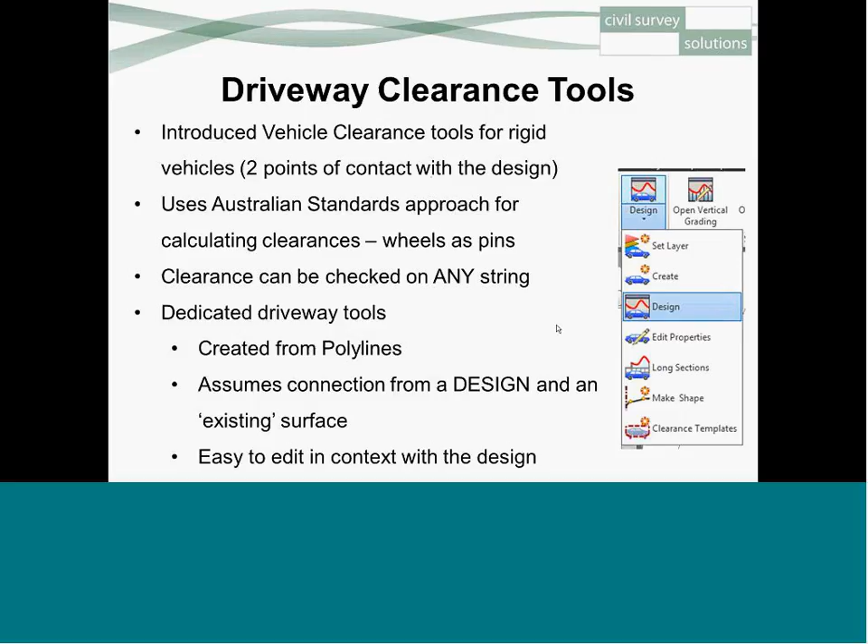Okay, moving on. In terms of the pure driveway design process, this is the interface you'll see when you make a driveway, and I'll take you through all of the tools in there. It is polyline driven. You can use as many polylines as you like to reflect the driveway. So sometimes your driveway is quite complex and your left and right side of your driveways need to be graded differently, and you can actually check clearances at any point along your driveway.

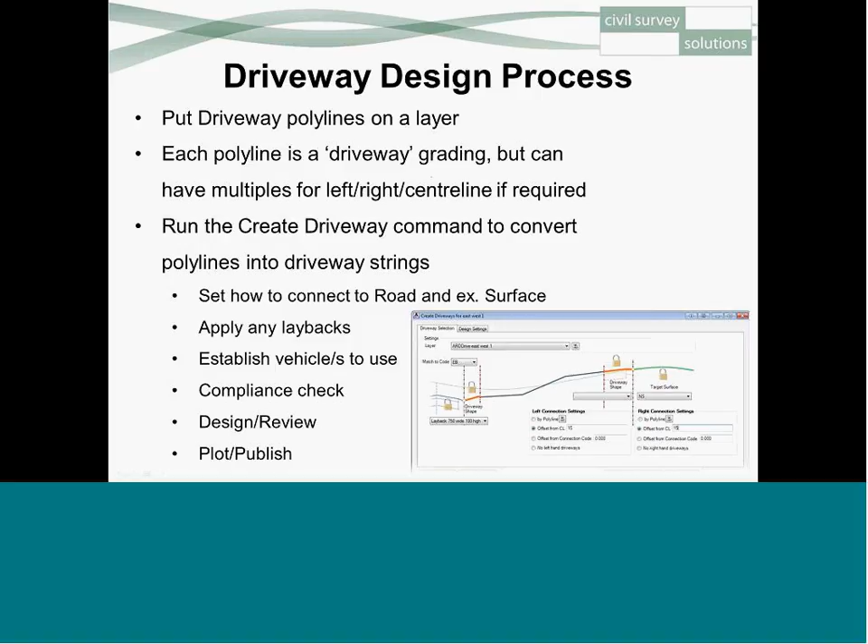I will talk more about the design setup, but this panel you see down the bottom allows you to relate polylines as driveway gradings to road design and to the existing surface. From a process perspective, once you've created your driveways, or even before that, you can always check your clearances. Once you create your driveways, there's a dedicated compliance check tool for driveways, and the image of that's on the right there.

It's going to highlight where it's run along your driveway strings and it's found a clash. Sometimes the sensitivity of that is higher than you want, which we will work on in the software, but it's certainly a great way to quickly identify driveways you should review.

When you're in the vertical grading editor, you can elect to show vehicle clearance along your string. It doesn't matter whether it's a driveway string or a pure road string or any other string that you've drawn. Okay, so if you want to simulate going down into a basement car park and there's steps in that basement car park, you can do that by creating an alignment, turning it into a string, and running the vehicle checker on it.

So it doesn't matter what you're designing, you can always check in terms of editing and stuff, but we'll come back to that. Let's start pushing in a little bit of a design here to have a play with. Okay, so I actually have a road design here. Most of you will recognise this. This is our timeless classic of Marin Street.

What I want to do is just introduce you to the driveway tools. So in terms of the driveway tools, they're all sitting under this panel called driveway. You'll see down the bottom that there are two settings controls. One is the idea of making a shape, which is used to tell the software you'd like a certain layback.

So if you work in local government or if you're doing subdivisions or any sort of road design, you'll know that you've got a strict curb shape that you like to design, but then once you hit the driveway, you'll normally lay that down into what's called a layback, stretch it out. For us, we called that making shapes because you might want to, at the other end of your driveway, where it connects to the property, put in a footpath or have a flat area representing a garage or something like that.

The clearance templates allows you to build your own clearance design for a vehicle. So a truck, certainly we've got the 2 Australian standard vehicles in there, but you can design your own vehicle shape and route that along your driveways to see what happens. I'll show you how that works later on.

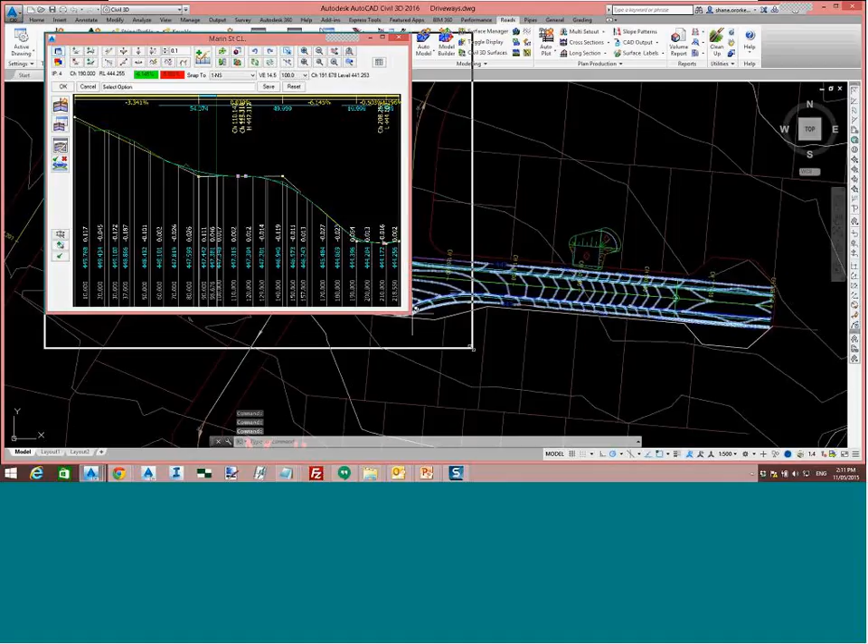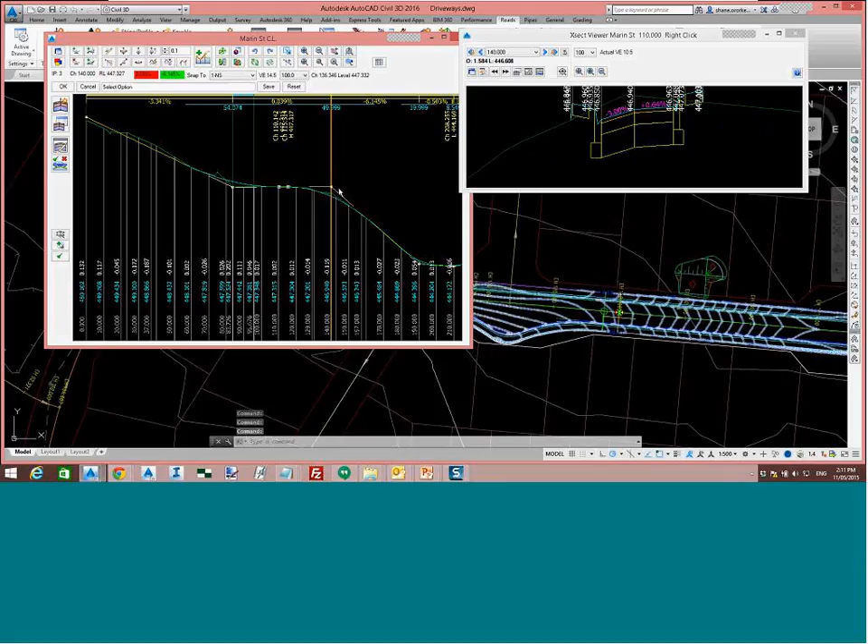Okay, so we've got a road design here. I'll just quickly open it up with a vertical grading window. So we've got a road. It's running from west to east, so from left to right. If I right-click somewhere, we'll see that there's some variability in the cross section. So I've applied some super elevation to this. I've also pushed the right-hand side out onto an alignment, so you'll see it sort of widens out, comes back. So there's crossfall changes happening. There's also some width changes happening to that road.

Now, in terms of checking for clearance, there's an icon on the vertical grading editor that allows you to pick a vehicle shape that you make and run that along your design. So the ones that come with the software are the B85 and the B99. We did have a generous donation from one of our customers with some clearance checking that they'd done. So they've been quite innovative in applying the vehicle tool as a sight distance checking tool.

I'm going to check it every 1 metre along the road, and I want to also draw the vehicle on the design. So in simple terms, you pick a vehicle to run through, how often you want to check that vehicle for clearance, what to do at vertical curves, so it splits it up into 10 segments to check. Do you want to show the forward and the reverse movement of the vehicle, or just forward or just reverse? And then do you want to draw the vehicle on the long section on the vertical grading window?

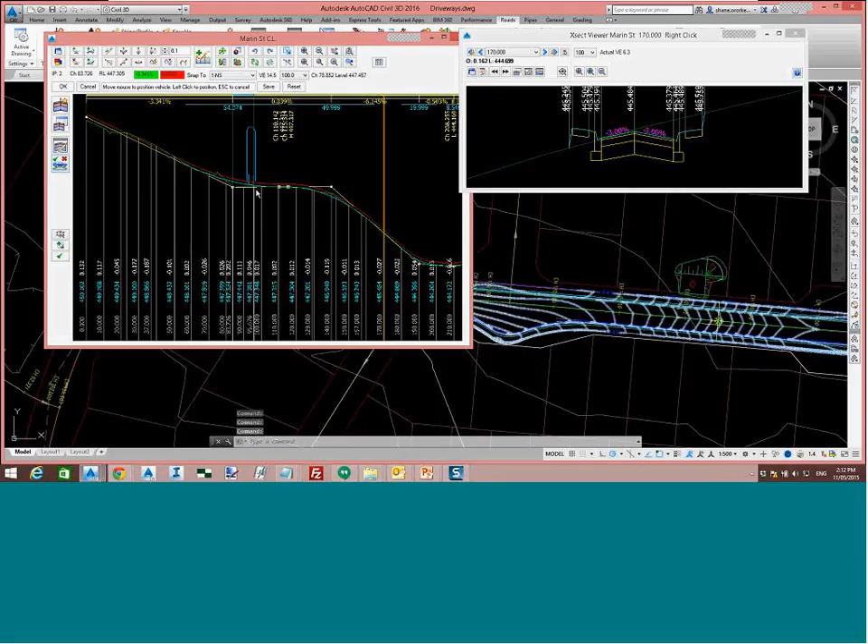The most useful one I find is showing the vehicle where it clashes, but probably the sexiest one is forwards and reverse. If I just click OK to this, what you'll see is I'm now running a vehicle along the design. You'll also see when we zoom in and have a look, there's a red line and an orange line which you can't see. You can change the colours of those, but they are showing you the clearance of that vehicle.

If I just change the exaggeration here to say 2, you'll see that we've got a vehicle and we're pushing it along the design. So anytime, any string, you can run a quick vehicle clearance check. The clearance check is dynamic.

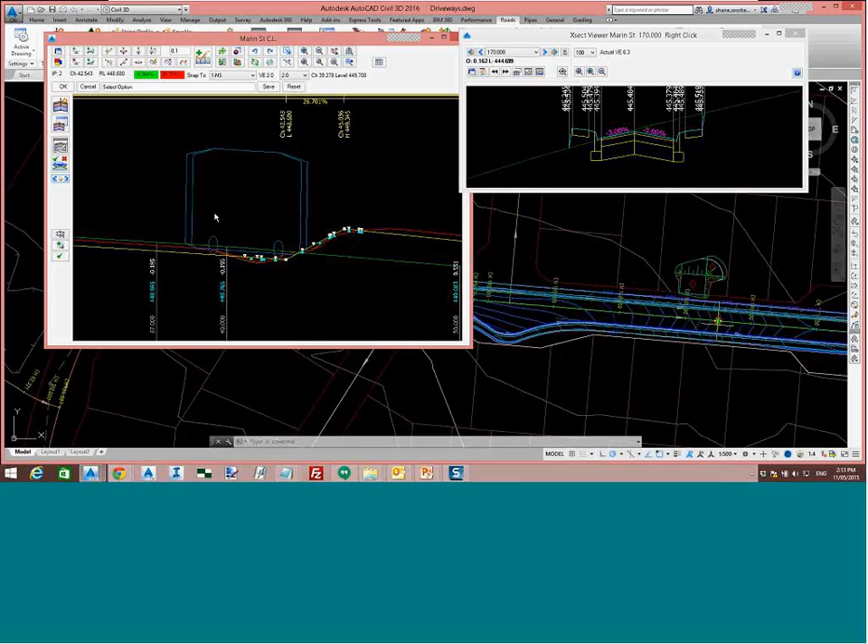IPs into the design. Actually see that it updates what's going on with that vehicle. If I click on this little icon on the left-hand side here, I can start moving that vehicle again against the design, and you can see that it's actually showing you where you're going to have clashes in a forward sense and a rear sense. So these little triangles that you see are actually highlighting where the vehicle's hitting the design.

When you move your IPs around, you can smooth out those issues. So you'll see I can push and get to a certain tolerance point, and then the software starts saying, hey, we're going to clash bottom out here and bottom out the other side. So once you push a vehicle along a design, you can then run that vehicle along and check. But these little triangles that you see, they're a highlight that you're going to have a problem with running a particular vehicle along your design.

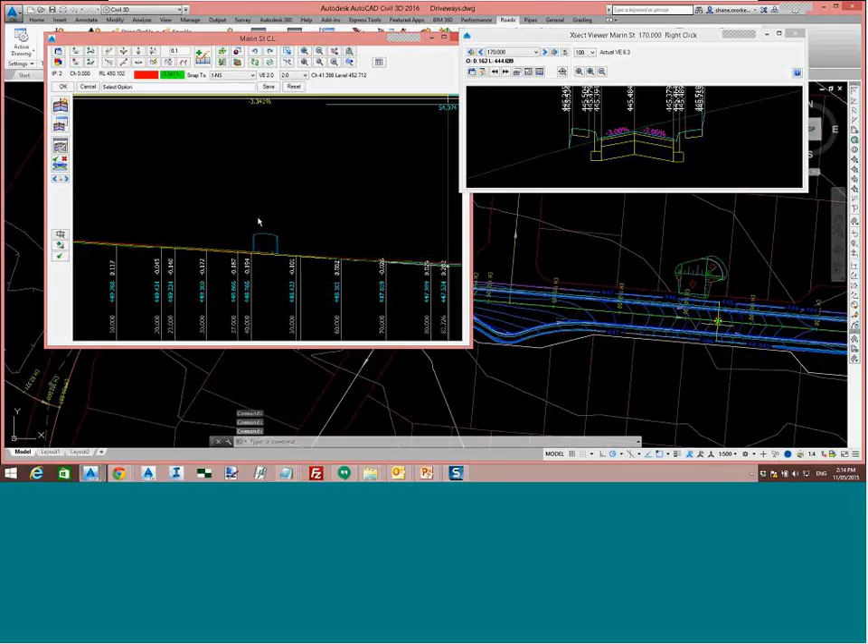You can certainly come in and change that vehicle type. So if I want to check the B99, I can check what the B99 is going to do. And it's going to be closer, but it's still going to work in this case. So this next one's pretty cool in terms of clearance checking. You can download from our website, from the Advanced Road Design blog, an enhanced series of vehicle templates. I'll show you how to make your own.

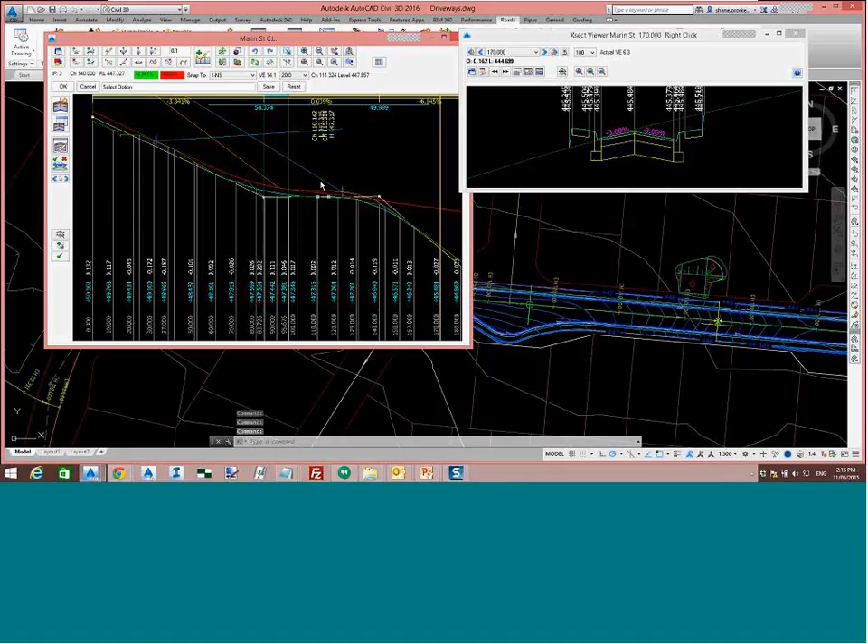But if we were trying to run a truck along here, 60 kilometres an hour, I know that you've got downhill controls and uphill controls that differentiate this. But if we quickly just assumed a certain sight distance control, we could actually run a quick vehicle clearance check. So this might seem odd to look at, but what the software is doing is it's showing you a 0.2 height here and a 2.4 height the other end. So we're running sort of a truck clearance in one direction and in the other direction. And the software is drawing some clearance lines here to show whether or not we're going to get sight distance for our truck running along the design.

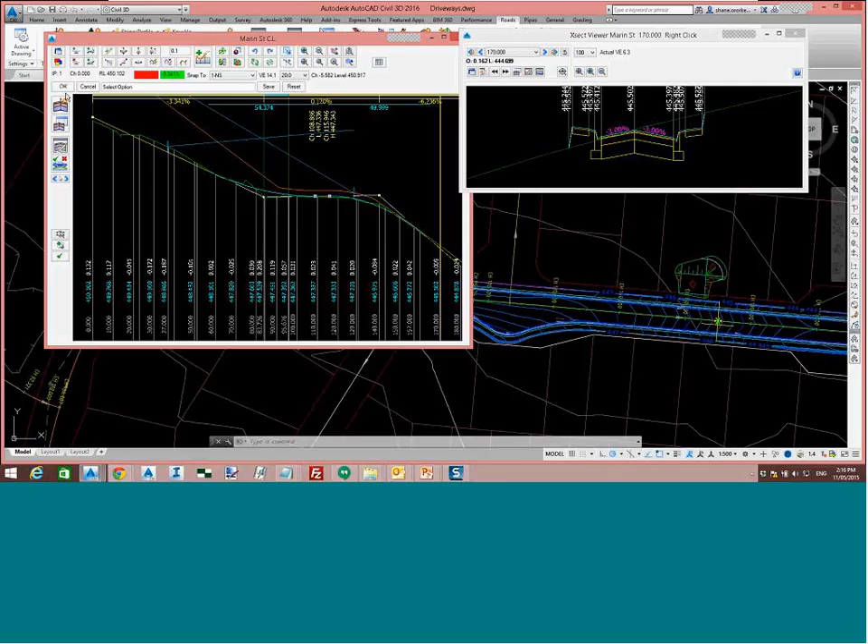All right, so you can be quite intelligent on how you use this. This is quite a sweet way to do some clearance checking for sight distance as opposed to a traditional sort of run-of-the-mill check on vehicle clearance. All right, so that's showing you that on any string we can apply a clearance shape and do a check. But let's have a look at it in the context of a driveway. So we want to check some driveways here.

I've deliberately created a funny sort of design pad here for us to check against for a garage. But in the basic sense, on the south side, I actually have a polyline for where I want the driveway to stop designing. So I'm going to fake in some driveways, but this is my property boundary. This is the extent. I can't design the driveway past here. Okay. On the northern side, I'm just going to set a notional width, and we'll play around with that later on. But if you have a property boundary and it's not a constant offset from your road centre line, the best bet is to draw polylines both sides and use those as your constraints.

Your driveway, in essence, if I was to notionally draw a polyline here, if this was a driveway centre line or a driveway edge, basically I would want to hook the driveway onto the edge of the road as a design constraint, and I'd also want to stop designing my driveway at this point here, which represents my property boundary. And I can do whatever I want in between. I might apply a standard layback here to describe layback. I might design the levels of the footpath coming through here to accommodate what I need in order to get to the property.

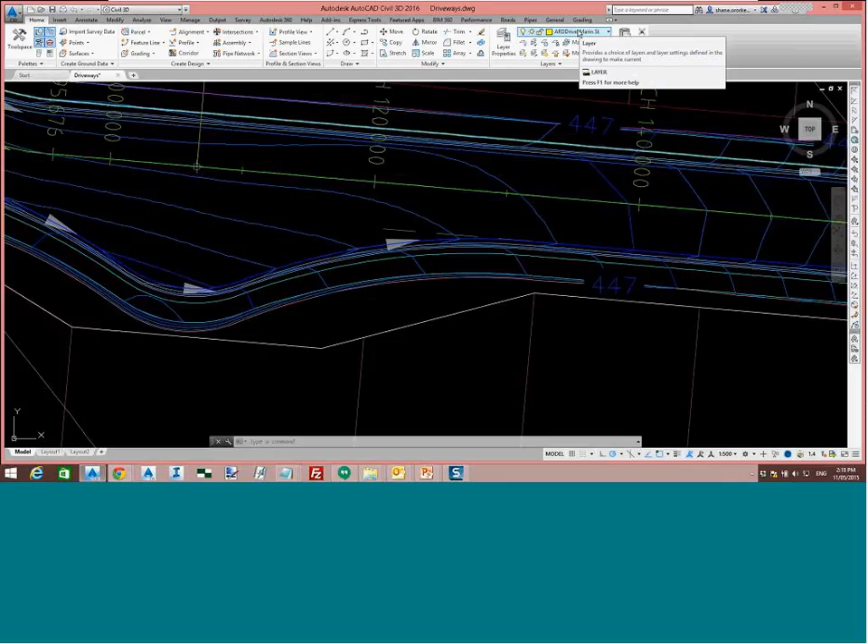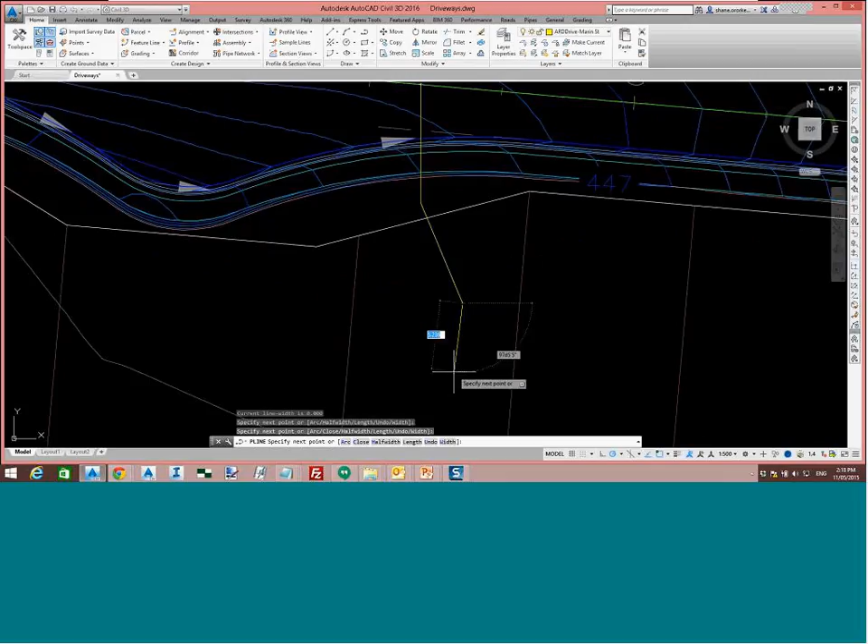You can draw any polylines you like, wherever you want. What you need to do is just put them on this layer to relate them to the string you're trying to design. So I'm going to draw myself a polyline here for a driveway. Now the driveway can have curves in it, and can be as long as you like.

As soon as I press enter, it's going to open up the driveway configuration, the driveway settings. These are overarching settings for the driveway I make now and driveways in the future. You can edit individual driveways to change how that driveway kicks. Let's just look at one driveway for the moment.

The layer, okay, that's the layer we drew our polyline on. Then you've got a code to connect to. Now this is the code off the main road, so we're connecting to the main road at a certain code. It's going to trace the road crossfall and the road shape all the way up to the invert of the edge of the road.

You can then apply a standard template at the edge of that, which we call a shape. I'll show you how to make these, but I'm going to apply an 80mm height rise with a 30mm lift, 750 width. So it's quite a generous, deep layback.

You'll see at the other end of the equation, the other end of the driveway, you can establish and apply a shape from the end of the driveway. The end of the driveway is where you connect it back to the existing surface. When I say the end, I really mean the end of the design of the driveway.

So when you draw a polyline that goes past the property boundary, that's good, you should do that. But once you hit that property boundary connection point, from there on in, it's going to wrap itself onto a certain surface that you get to pick. That end shape would be a little footpath you want to put from the property boundary outwards, or maybe a flat garage or some shape like that.

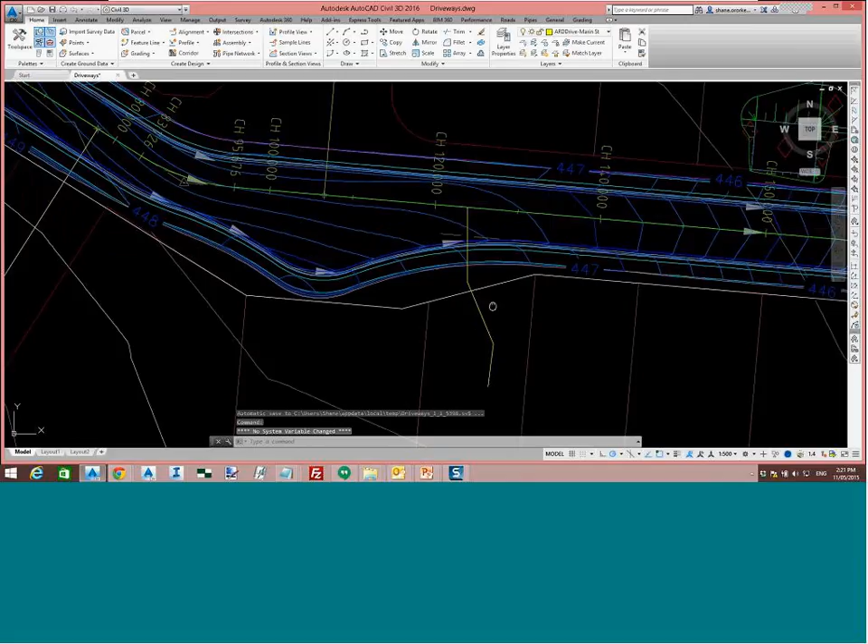If I click on Create Driveways, what I've done is just turned this polyline into a driveway. If I draw more polylines on that layer and run the Create Driveways tool, then I'll be creating more driveways.

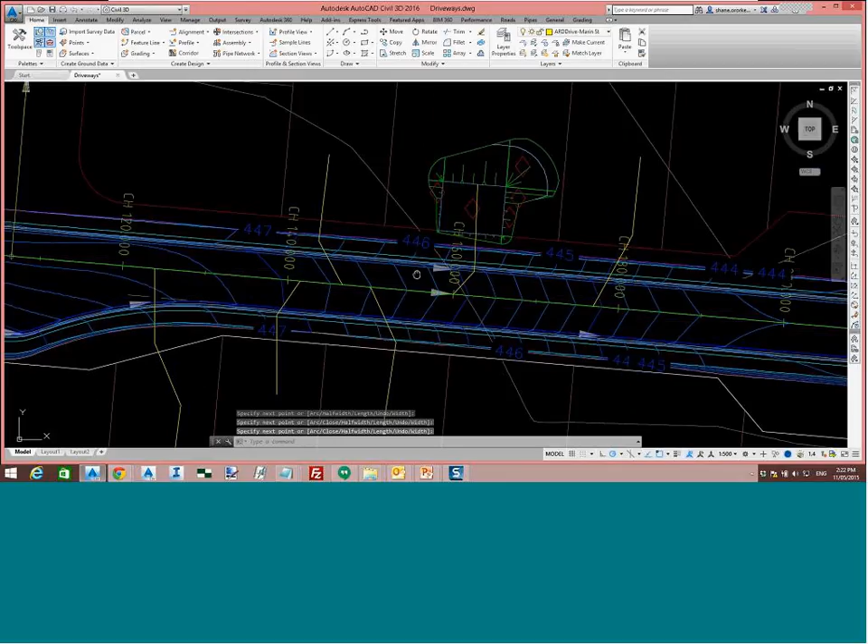Once I've established my driveway properties, my driveway conditions, I can then go and make lots of polylines. As soon as I run the Create Driveways tool, it will apply these settings, which I've already established, across to all of those other polylines. So silently, the software has turned those polylines into strings, driveway strings. The way to see them is to run this tool, the vertical grading editor.

I'll do this now, and we'll come back to the compliance check. So I'm going to open up one driveway, the first one we created, inside the vertical grading editor window. This is me looking at the vertical design of that one driveway. You'll see that there's a tracker, which is what we expect.

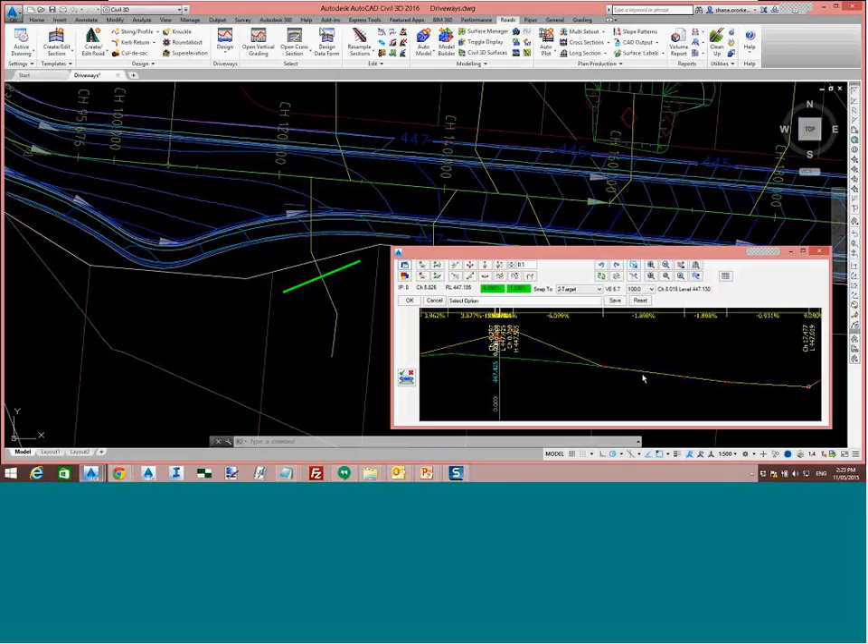There's a shape in here, and once we get out to this, we've got a series of IPs that sit on the surface. I'm just going to make this vertical grading window bigger so we can look at it in more detail.

Any IPs that I try to edit up to the invert, it's going to tell me I cannot do that because I've locked them. Any IPs I try to edit after the property boundary, it's going to say, sorry Shane, you said you wanted to connect those in. What happens in between is totally up to me, though.

If we have a look at what the software has done, it's actually added from the invert a lip and then a layback. So this little shape here, these two lines, these two IPs, they represent a standard layback that I've applied for this particular driveway and for all the driveways initially.

If I change my exaggeration to, say, 2 times exaggeration, so I flatten it out a bit, what I'm going to do is check the driveway clearance. This shape at the start here, coming off the road, the bit at the end attaching to the existing. If I click on Select Driveway here, I'm going to run the B99 vehicle across this. I'm going to check clearances at 200 mil, so every 0.2 of a metre I'm going to do a clearance check.

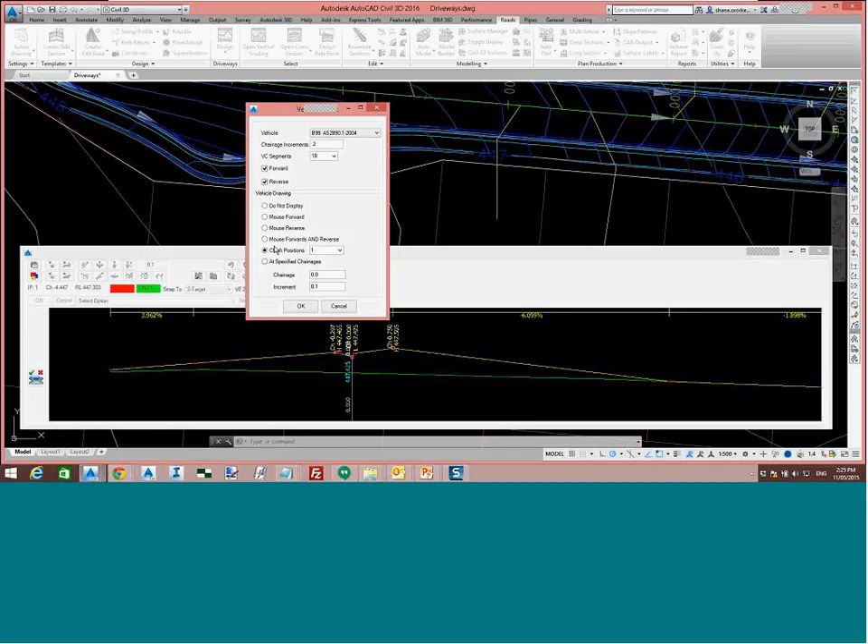I'm going to run clash positions. I actually do mouse forwards and reverse. I click OK, and there's my vehicle moving over that design. So you can see with the red line, we actually don't have a clearance problem with this particular driveway.

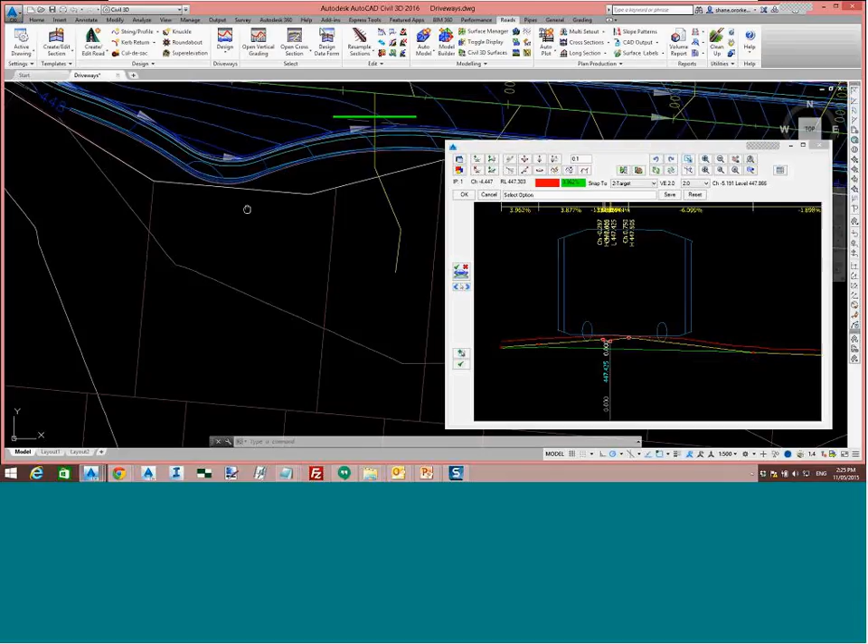Now, let's do a little bit of a check here. What would happen if I opened up my main road and started playing around with it? So if we look at and think about road reconstruction, here's my main road design.

I'm deciding that I want to play around with that center line, lift it up, lower it down. What you'll see is that your driveways that you have open, you can view what's happening with those as you alter your design. So as I change that design surface and start moving it up and down, I'm having an impact on not just that driveway, but every driveway in the run.

So that's one aspect of editing your driveway. The one that you're probably less likely to be able to do, certainly in a road reconstruction sense, would be to move your driveway alignment.

So you can graphically redesign your driveway alignment here to try and get a better result for your vertical grading. So you can change your road design and you can also change your driveway run through, your driveway alignment. There are two ways to edit the design.

From a vertical perspective, you are able to add vertical IPs anywhere you like inside that design zone for your driveway. So you are able to add in IPs and remove IPs to improve the driveway condition. Quite often you need to get in and start putting plates in your driveway.

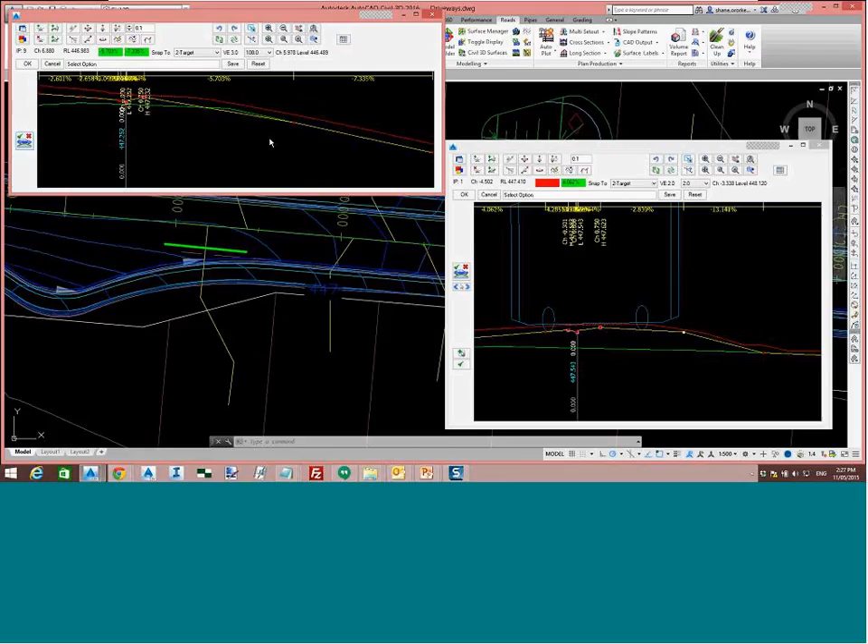Now we'll come back to looking at individual driveways, but I can actually open up as many driveways as I want, and I can review each of those driveways by turning on the vehicle checking at the increment that I want to check at. So I can open up more than one driveway grading and have a look at each of them.

There is a tool in here called a compliance check. Now, the idea of the compliance check is to run through each of the driveways that you've designed, so each of the polylines that you've got in there, and check whether or not you're going to have any clashes, any issues. Now, what it's telling me in this case is that each chainage, checking the B85 and the B99, all of them are going to be okay.

So what happens if I make some changes to the conditions? What I'll do is I'll just make it a little bit nastier on the road design side. I'll just lift things up a little bit.

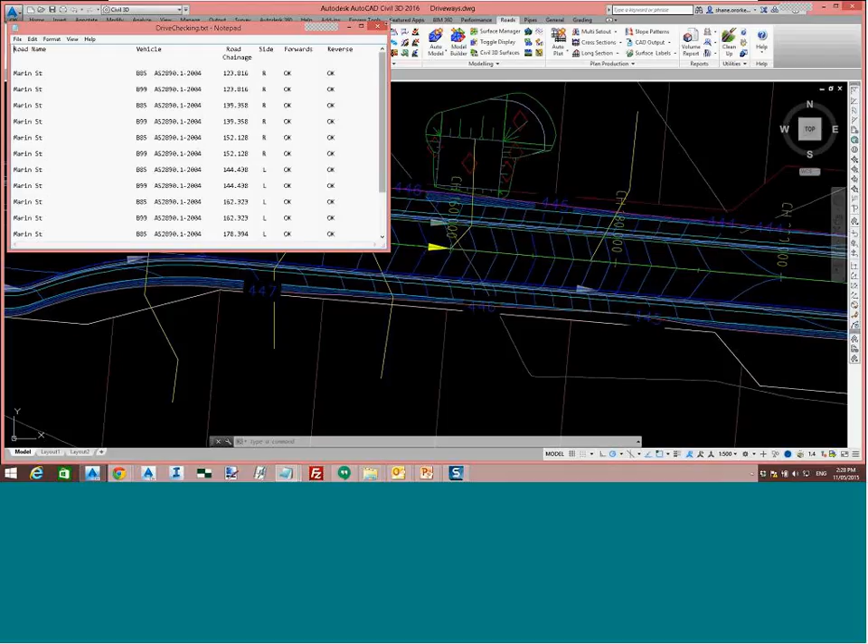And then if I run the compliance check, I still have everything okay, so I'll lift it up a bit more. I'm actually trying to cause myself a little bit of grief in the design. Nope, higher, Shane, make it even higher. Alright, that should give me a fair bit of grief, hopefully. No, all these driveways still work.

So the compliance checker will basically identify when I have a problem, so when it is that the driveway clearance doesn't work. And it keeps working for me. Let me just put a driveway - what I'll do is draw another polyline out here where I should definitely have a problem because it's going to be quite tight. I'll turn that into a driveway by using the create tool.

And now if I run the compliance check, oh, there we go - suddenly we have lots of clashes. So it looks like I had a bit of a refresh issue, but I've now got lots of clashes going on. So everywhere that I have a problem, I've got a little cross, and that's an indicator for me to go back and have a look at that design and make sure that that design's working okay.

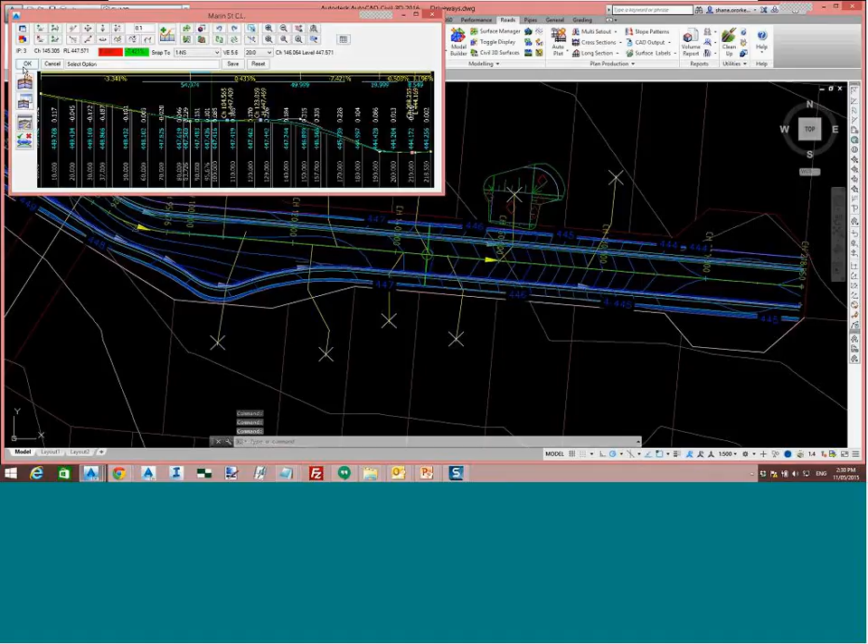If I run the compliance check again, still lots of clashes. If I just refresh my model here. Yep, okay, so it looks like we've got a little bit of a tight ramp issue to do here, but if I just refresh the driveways and compliance check, I'll now see I've got 3 of them that don't quite work.

Okay, that becomes your alarm bell, that becomes your notification - you better go and check at least these 3 driveways and check what's going on in terms of clearance. So B85 works for this driveway, but I'm guessing the B99 has a little bit of a clash here. So I can see that I actually hit at the start here. If I just drop in an extra IP, try and pull that out, I can then fix my problem.

So this is one way to address driveway clearance issues. If I now run the compliance check, I see that that compliance issue goes away.

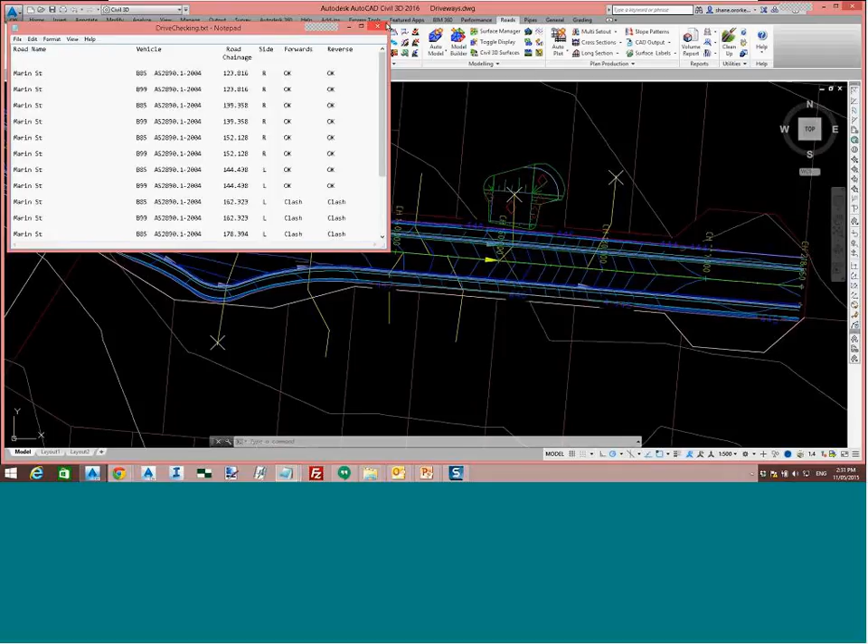What about this driveway at the northern side? If I have a bit of a look at this one, let's see if it's as bad as the others to try and fix up.

You will get occasions where changing the levels just doesn't really cut it. In this case, it's probably okay for me just to change the driveway design, but you'll get issues where the driveway design just still doesn't work no matter what you do with the levels.

And the reality is you might need to change the layback for this particular driveway, or for this one on the south here where it's quite dreadful to try and get around. So maybe for this driveway, if I look at the design of this one, you know, this is very severe.

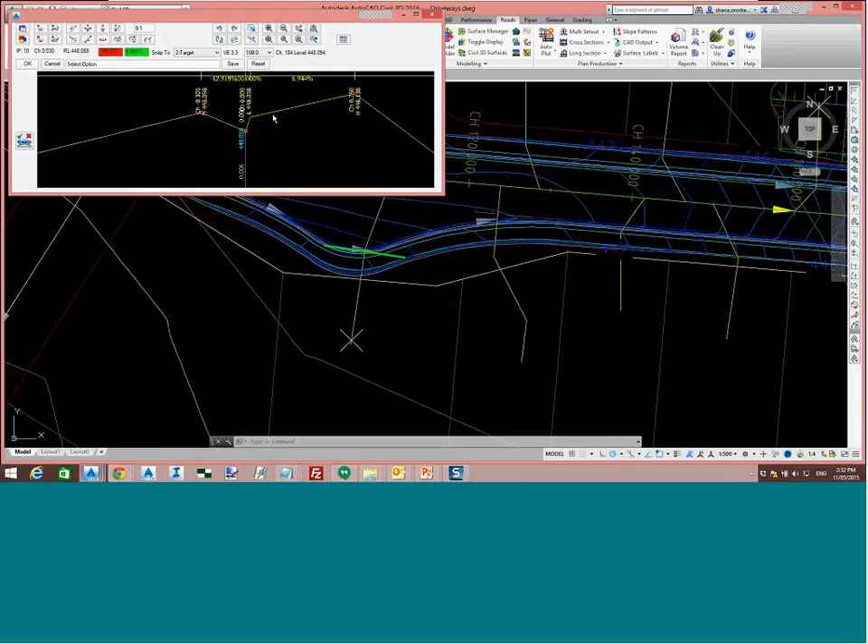I probably can't do anything with it anyway, but maybe if I had a different layback, it would be easier. Maybe if I got rid of the invert, dropped down, flattened this out somehow, you know, maybe I might be able to do something with it.

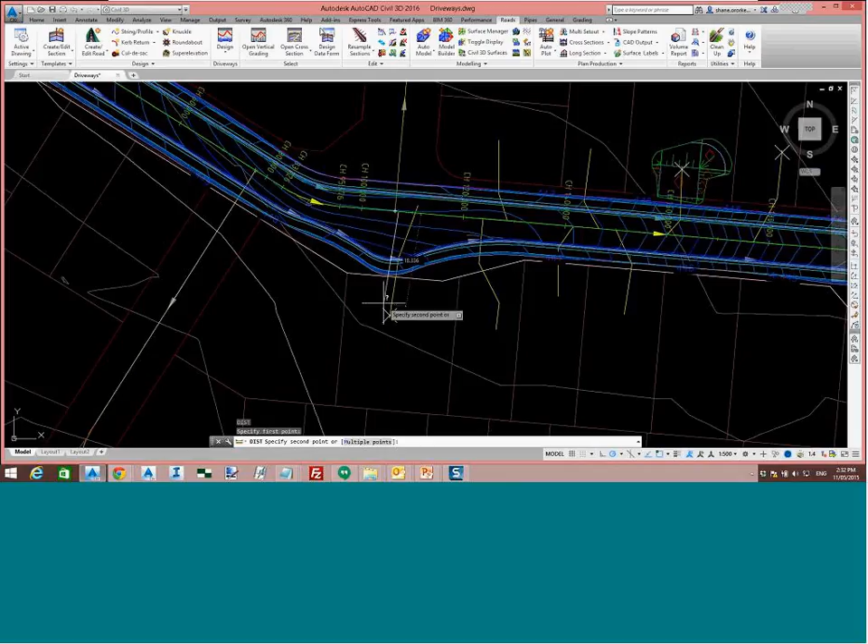You can actually change the behaviour of any of the individual driveways to have a different layback or different offset conditions. So maybe with this particular driveway, I actually need to work back into the property. So maybe what I need to do is work out how far in I need to go - maybe I need 18 metres here from the centre line in order to make this driveway work.

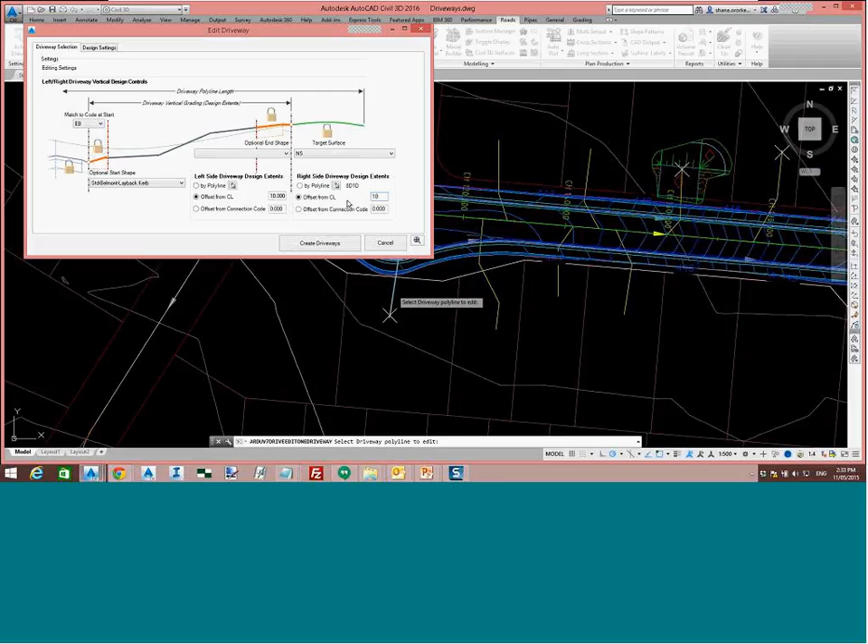You can go to individual driveways by using the Edit Properties command, and you can attack individual driveways and change the behaviour. So for this one driveway, I want to connect to the edge of bitumen instead. I want to change my layback to use the Belmont layback - we'll make one ourselves later on. I might also want not to use the polyline for the offset, but to actually specify 18 metres for my driveway offset. So I'm editing an individual driveway - different layback, different edge connection conditions, different end connection conditions.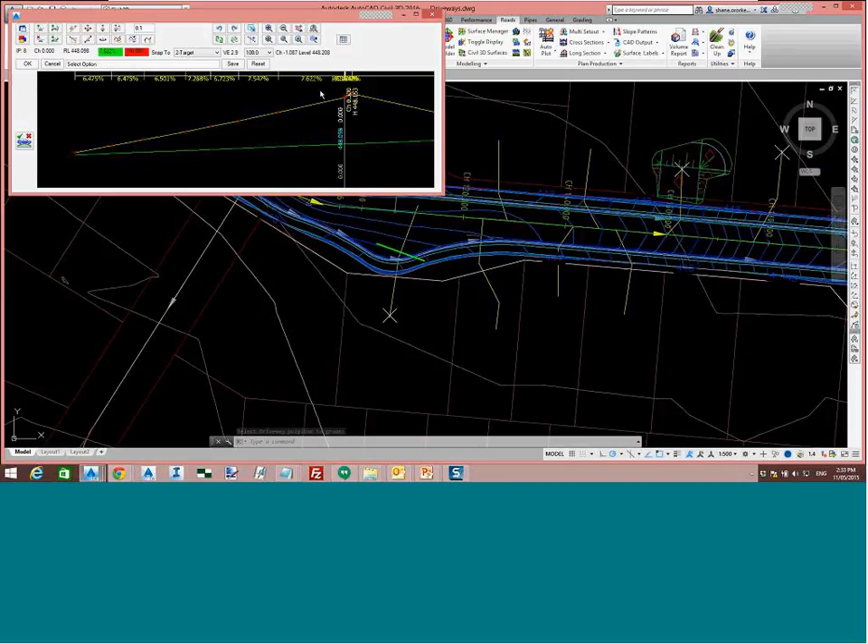So now when I look at that driveway using the design button, I've now got a bigger distance to play with, and I've now got a very different layback attached to the invert. It doesn't really make sense, the layback that I've attached, because I really should have made one that had an edge as well. But now when I check my clearance, I'll have a different set of issues here.

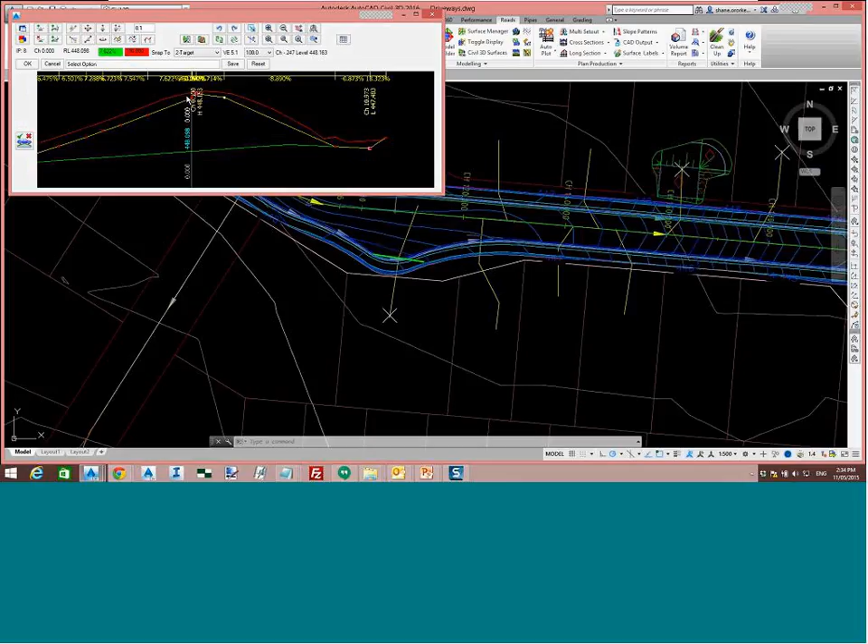So I've probably got a lot more space to play with for me to stick in some panels and fix up the grading issue that otherwise I couldn't fix. So you can go to individual driveways, change the connection conditions, change the type of shape you put on at the start, and also the connection off that road. So you can actually put in a fair bit of variability.

Let's have a look at some of that setup. For this one, I've got a garage pad. For this particular driveway, it needs to connect to the garage pad. I'm going to come in here and say, okay, go out 10 metres. That's fine. Actually, maybe I should do a polyline. Do I have a polyline here? Okay, let's draw a quick polyline. There's the edge of the carport.

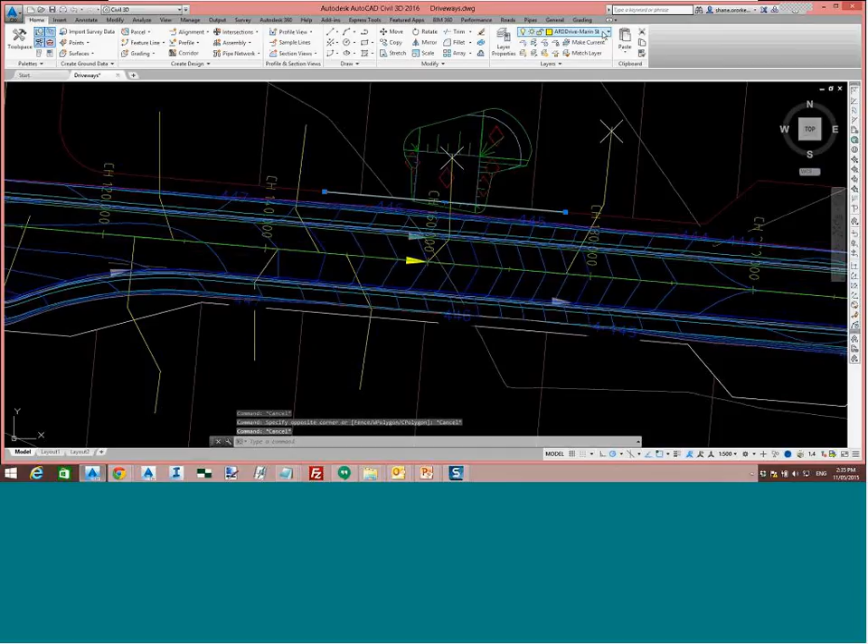So I'm going to edit this particular driveway. Now, one thing to be very careful of: don't put any polylines on the same layer as the driveway layer unless you're going to use it for a driveway. So I just caught myself one there, right where I could have had an issue.

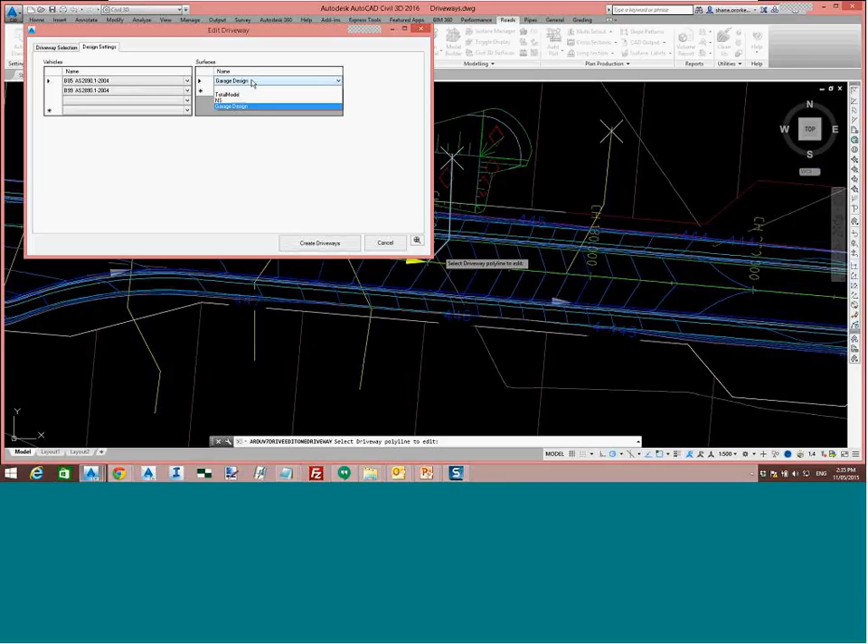Edit properties - I'm going to grab this driveway, and in this case leave it with the standard layback. I'm going to, however, connect to the garage for the end of the driveway. So I'm targeting the garage as my connection. I'm also going to change the left side to use this polyline for the driveway edge.

So if I now look at this in the design panel, I can see that I'm actually connecting up not to the existing surface, but to a designed pad. So if you are designing your driveway entry points, if you're doing work inside a property or subdivision and you've designed some pad areas for some garage entries, you can actually decide to connect to those instead of the natural surface. That's really what this allows us to do.

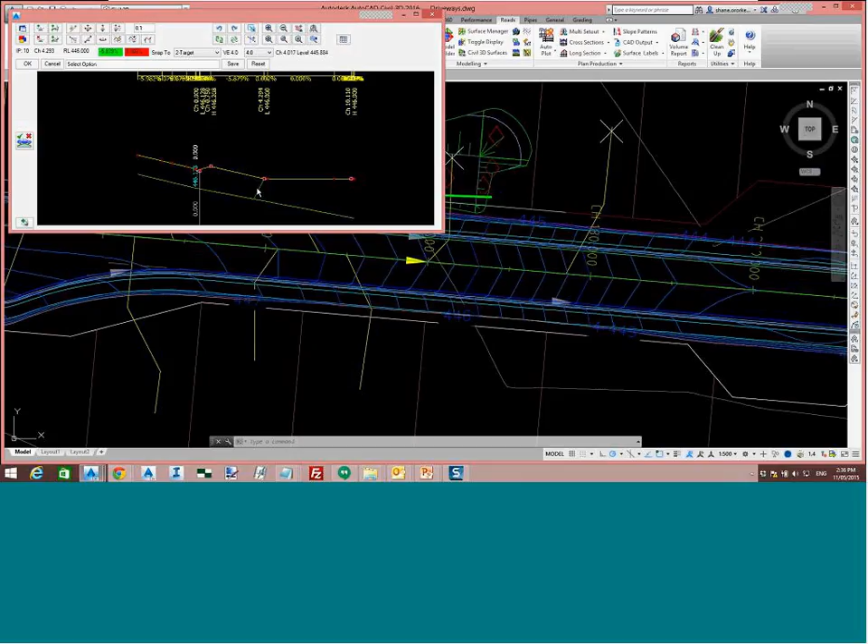Okay, so you can see we're connecting up to a design pad as opposed to the natural surface. So that was a quick tour on the basics of setting up driveways and checking them and making sure that they can be designed and work. In terms of establishing some of your own input controls and output controls, we still haven't gone into the long section plotting, which I will get to after we do some more on the mechanics.

We actually have the ability to set up our own shapes - these are the laybacks. I'll quickly just go in and talk to you about setting up a layback. I'm going to make a layback. I'll just quickly show you in the PowerPoint here what my intentions are.

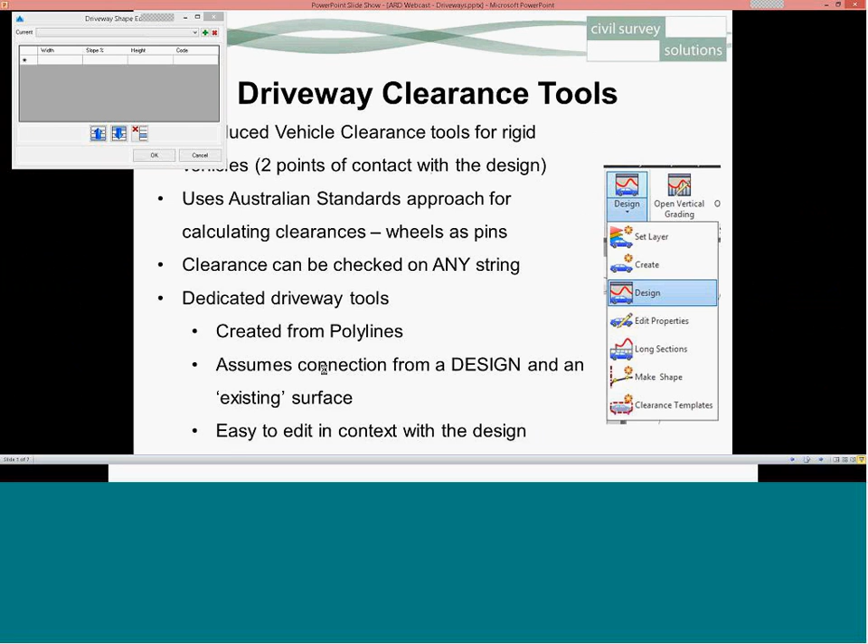So when it comes to editing driveways, we've done most of these. You can go and change the code to connect to the property, boundary, extents, surface. You can also change your layback. So this is a screenshot of a traditional layback and then what's called a notched invert layback. I found out about these in Tasmania, where what they needed to do was pretty much get rid of the invert because they couldn't get vehicle clearance - it was too tight.

So they had this idea of a notched layback. Now, you can do this properly, or you could do it very simply. If I was designing this for vehicle clearance, I would do a straight line from this point to that point, or have whatever the grade break was in here. But the idea is that we're going to get rid of the lip, get rid of the invert and replace it.

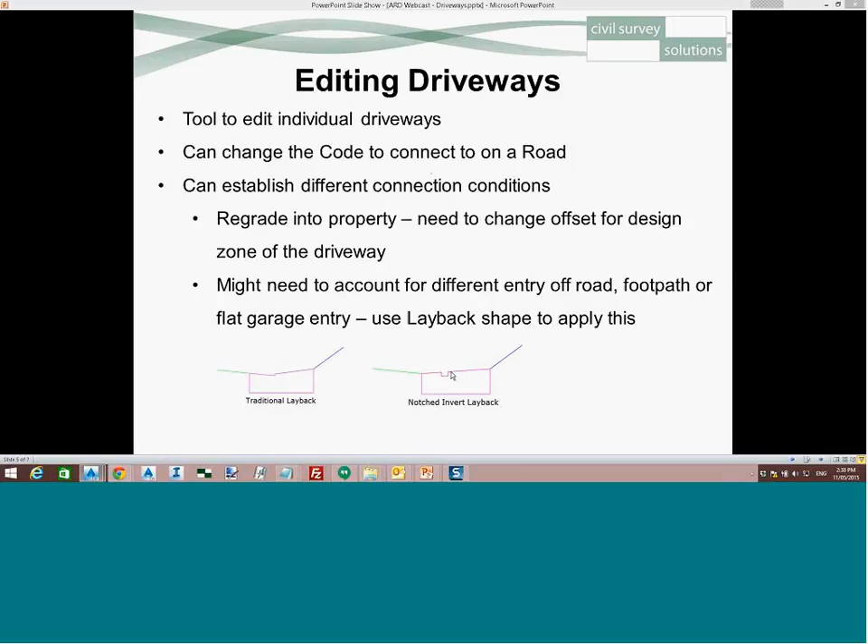The way to do that would be to create a new layback. So I'll show you what a traditional one looks like. Here's a layback, 600mm wide with a 30mm lip. So there's a 30mm push out, a 30mm height change, a code, 570 from there, 70mm lift - so we're doing a total lift of 100mm. This layback is intended to connect to an invert.

All right, I'm going to make a new one. I'm going to call this one a notched layback. Very simply, I'm going to go out - let's say the normal distance I go out to the tray, say 400mm - and do a height difference of 40mm. Normally that would be the invert, but it's not.

I'm then going to go out an extra 600 with a height lift of 0.04 again, and this is the back of the curb. So what I'm doing is I'm designing a very different layback. If I now go and edit my driveway, let's say this one, and I'm going to connect the edge of bitumen instead of the invert, I'm going to apply my notched layback.

So when I look at this individual driveway, this one in particular is a notched curb. Okay, so I've pulled out the invert, replaced it with a simulation where I can run the vehicle across and do a bit of a check. Right, and I actually caused myself a bit of grief. I'd throw an IP in here to fix that up. Okay, so that's you changing your individual layback shapes.

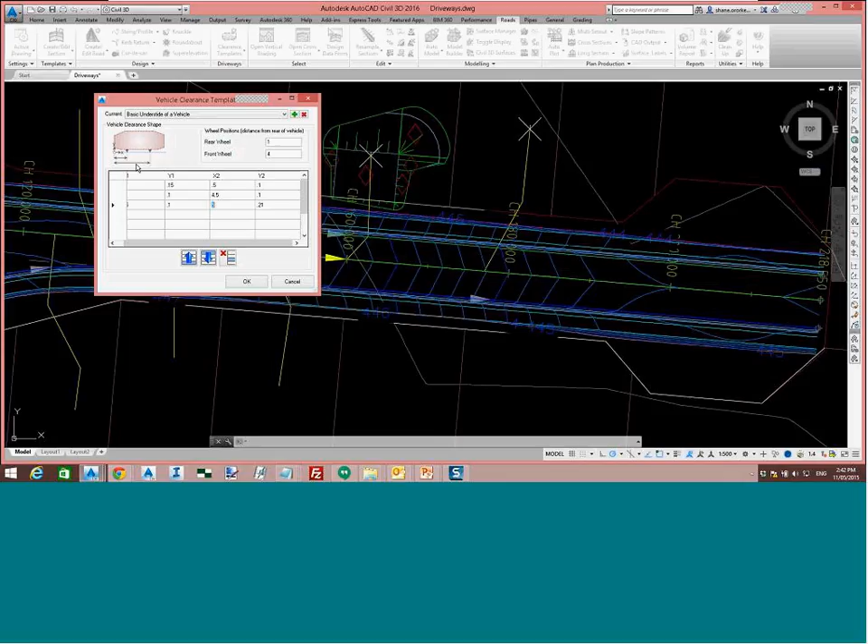And then I'm going to go from the 4.5 meters across with 100mm height, and I'm going to go 5 meters at 0.21. So all of these distances are measured from the back of the vehicle. Okay, but what I've done is drawn 3 lines, essentially. I'm going to now open up one of these driveways, and I'm going to run that vehicle against it.

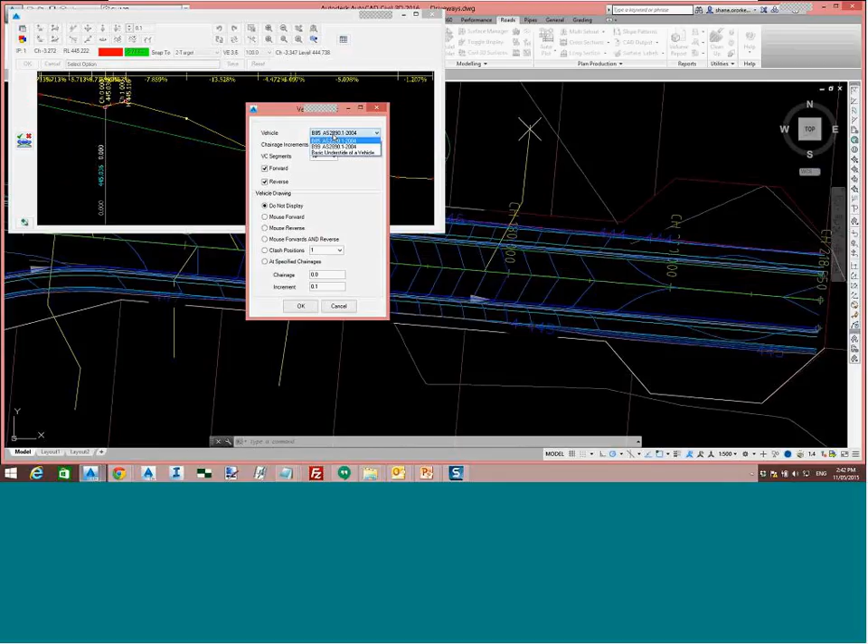So if I come in here, I can now pick, here's the trick. I need to edit my properties here and add to this the vehicle that I just made. By design, I'll have in my arsenal the basic underside of a vehicle. And if we have a quick look at that, I'll actually draw the vehicle so you can see it. There's my very basic design. Okay.

All right, if I just show it in the forward direction, so we get rid of the reverse here. All right, it still shows me both shapes there, but I've got a front end and I've got a back end, and it's pushing that shape across the system. That was me making a basic template for routing a vehicle.

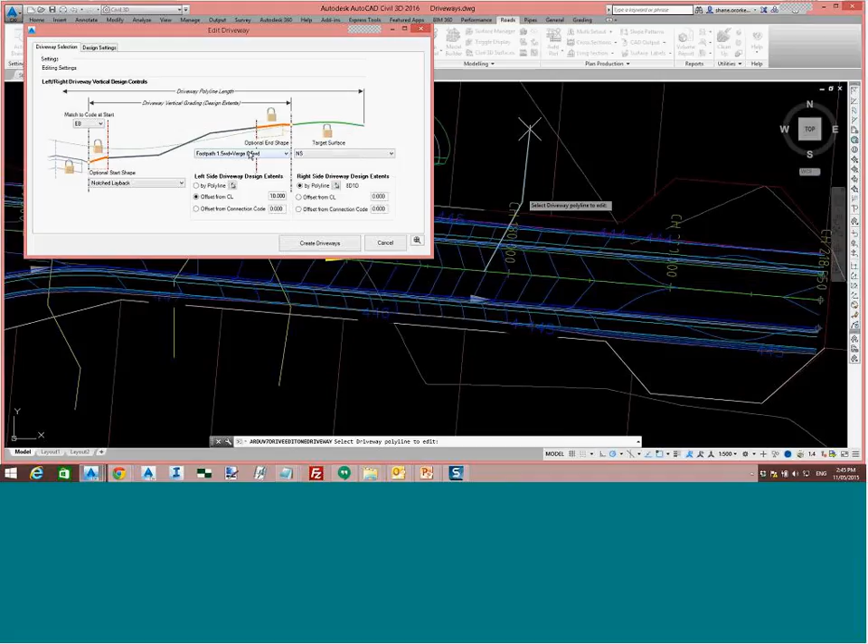We haven't looked at layback at the end of a driveway. I will show you that. It really is the same as putting it at the start, it's just done in reverse. Layback at the end of, let's go with a footpath 1.5 metre wide. So there's a template describing a footpath with a verge.

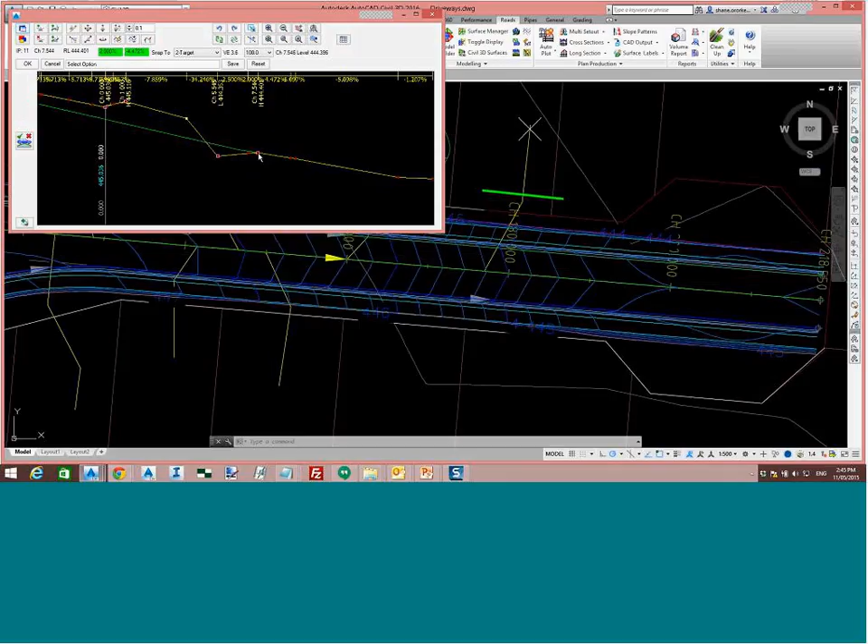If I now look at this particular driveway and design it, you see these IPs here, they're all locked and they've come from a footpath template that's been applied. So this shape here, this layback, is what's controlling what happens just before the property connection point. Okay, so you can throw that shape at the start or at the end.

Let's have a quick look at the plotting output. So you can go to any of these vertical driveway checking runs. You can make sure that they all work. You can change the layback. You can check different vehicles of your own devising.

At this stage, we're not dealing with articulated vehicles, so we're not handling a trailer. We're not handling a truck movement where there's multiple axles. It's really 2 points of connection at this stage. But let's look at the plotting side of things. So we're going to generate some long sections for our driveways.

What you're going to see is a precursor to, I guess, what we're planning to do with long section and cross section outputs for road design. So some of the facilities you see when I run the long section tool and the structure are similar to what we're planning to do when we roll out the new long section and cross section plotting tools for advanced road design.

I will say for those of you who have been waiting a long time for these tools, the developers right now are working up the new cross-section plotting. So that is currently what we're developing, a new cross-section plotting engine. From that will come the long-section engine as well. But it is in development right now. But let's run the driveway long-section plotting. So we click on long sections.

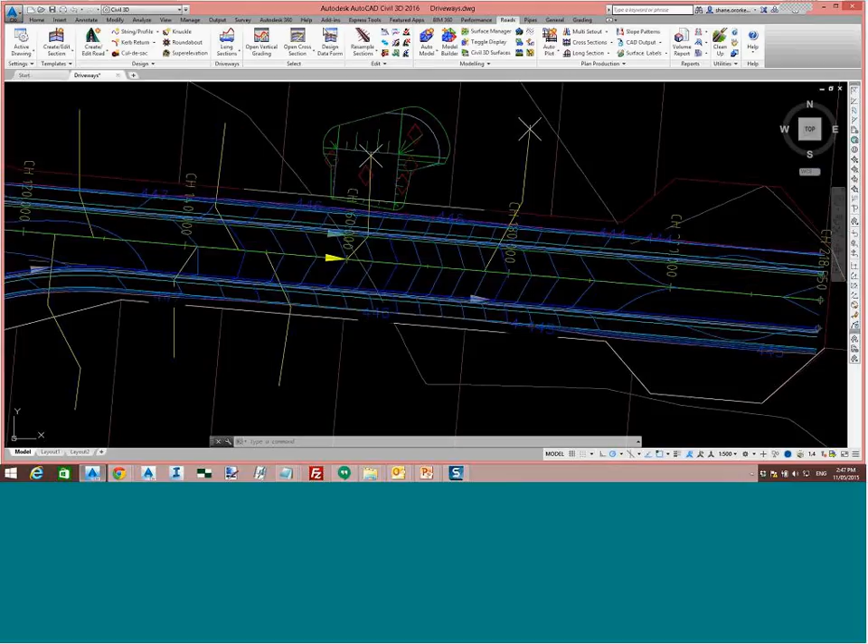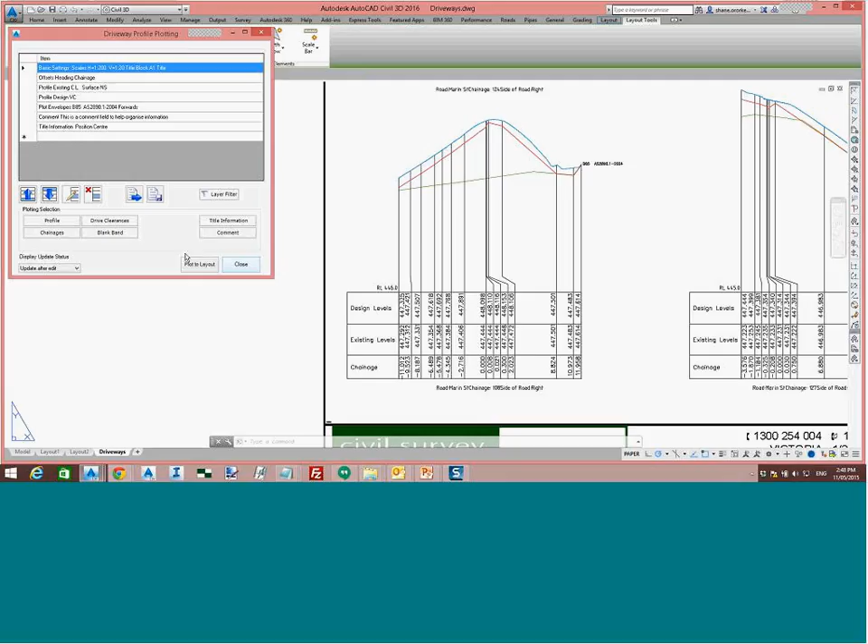Okay, so a couple of differences between what happens in here and what happens in current plotting. The form is modeless, so you can go and zoom in and pan onto anything. You're not limited to a special button just through the layout. At this stage, we put all the driveways on one layout tab. We certainly can expand that out into plot to file and multiple layout tabs, but we're arranging them on one layout tab.

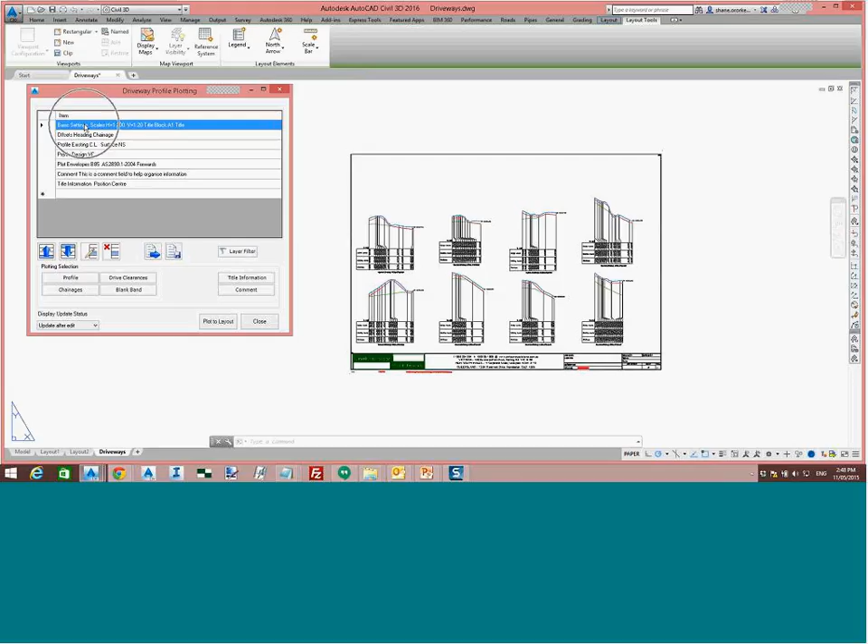Now, the interface is different to what you have in current long section plotting. We've reduced the buttons down the bottom, and we've done that by always having what we call basic settings. So what I might do is review what's here and make some edits. This is the standard output when you first run your driveway plot. As per current plotting outputs, you can save and load your own styles of presentation. So you're not locked into what we show you here. This is just a starting point.

On the long section that you see here, you've got chainage, existing levels, design levels, and we're also showing the vehicle clearance line, which is this guy here, and the design of the driveway. So the design of the driveway happens by clicking on profile. Chainages is purely to show the chainage information, and then the drive clearance button here will show the drive clearance.

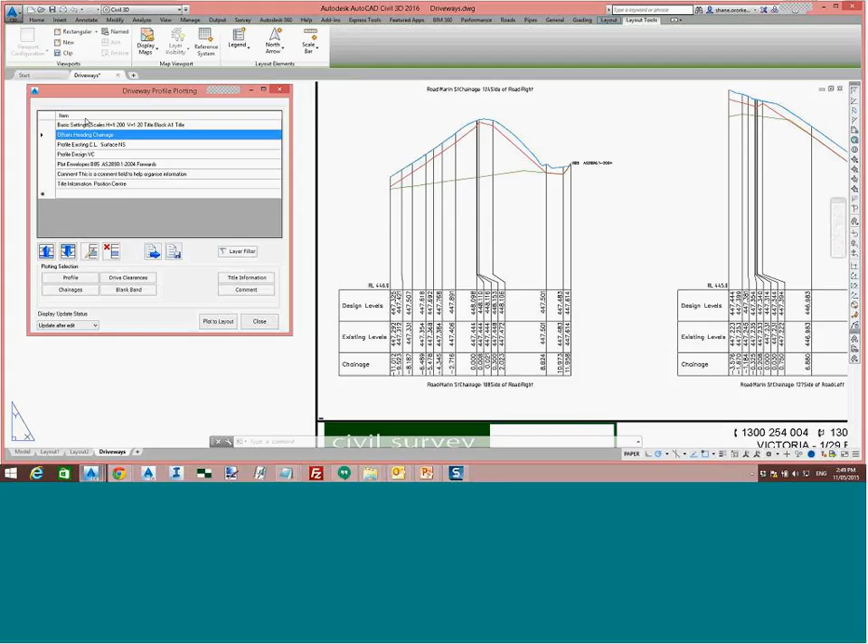Now, we're doing things in one sense quite similar to the old way. You've got a series of entries in a list here, and each of these entries drives some aspect of display. So the offsets entry here, for instance, controls the chainage. If I wanted to move that up in the rows, I've got to move it down in this list. And as soon as I do that, it will update straight away. So as you make changes in here, we're trying to be a lot more reactive to show you the impacts of those changes.

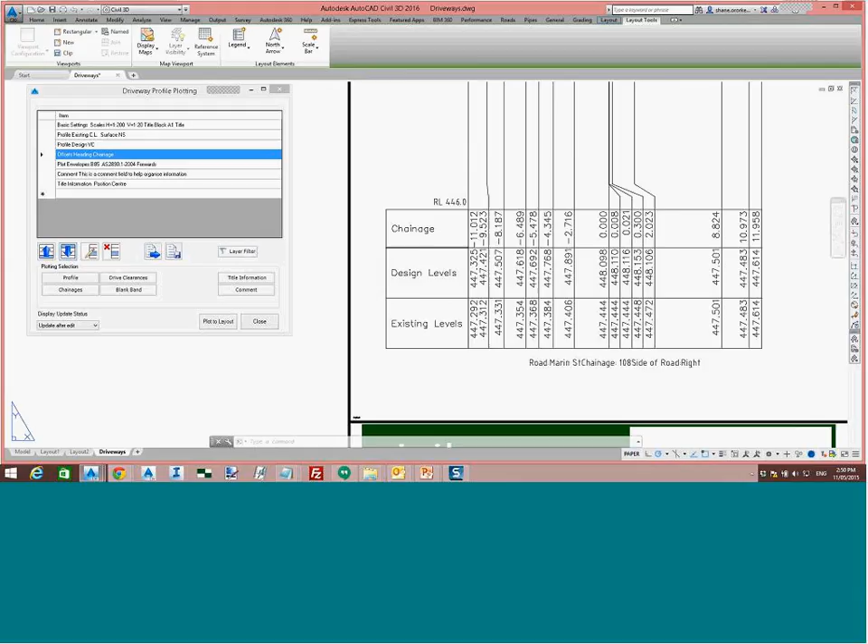Now, a little bit different, the basic settings entry will always be there no matter what you do. You can't delete the basic settings entry. What this outlines is the general behavior of the system. So the horizontal scale, the vertical scale, I'll make that a little bit flatter. I'll make it steeper. It sets up the title block, also sets up the spacings between these, the band height by default, which I'll make 25 in this case.

There's also some spacings for VC grade lines. This stuff is in development, so I won't harp on about what those two items do. If we look at the datum specification, this controls the information here with the RL, so rounding, minimum distance from the bottom up, so let's make that say 5. Actually, what was it? Anyway, I'll leave it at 5, we'll see what it does.

Fixed datum. You've also got your datum drawing, okay, so this is drawing this RL text. So very similar to what you had. I'll put an M at the back here for something different. A little bit of offsets, some cranking controls. Again, those two are in development.

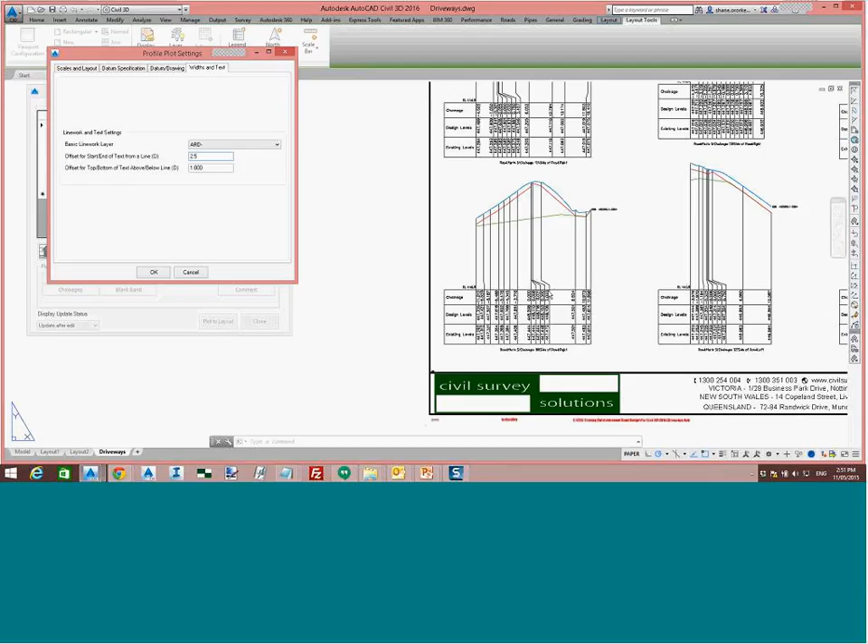Okay, in terms of width and text, this is cool news. If you wanted to move this text around relative to the top right corner, you could, say I want that 2.5 off the top edge here, and basically you're pushing that text around a little bit. As soon as I click OK, you'll see that those bands are a little bit different, a little bit taller, but you'll see that text offset's changed.

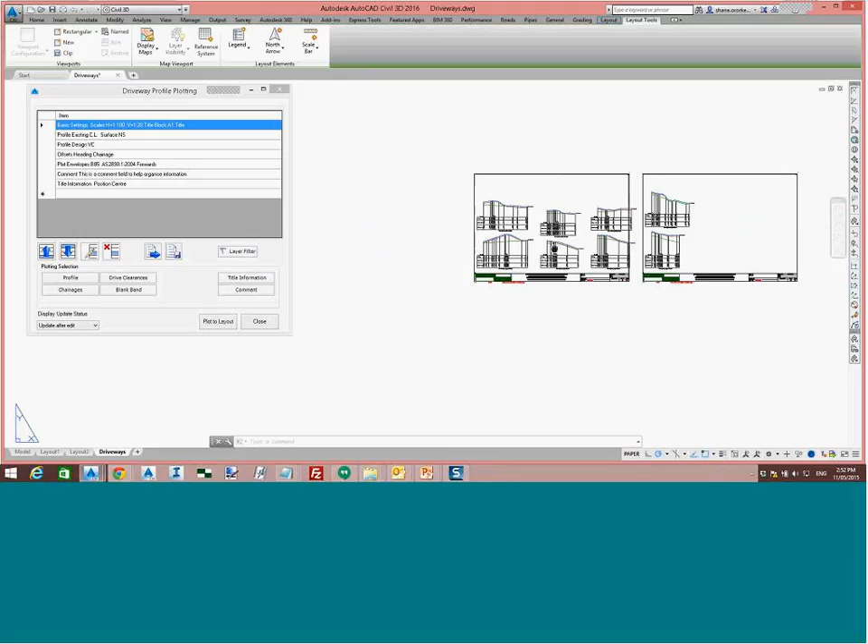The driveways are flattened out and stretched out a bit. Some of them don't quite fit. We can rearrange that later on. In terms of the other information, if I double click on, say, profile existing, which is the existing levels, I can double click to edit that entry.

Now, where things are changing in the software, if you have a look, we're currently only able to pick the current driveway, but when we expand this out, you'll be able to pick whatever object you want. Once you pick existing or design, it actually has an influence on what tabs you see up the top and what options you have down the bottom.

So if this is the design VC, I could actually opt to show the VC details, or I could turn them off and disengage that tab. If I untick Show Row Band, I'll get rid of that tab as well. So you're only getting information about what you want to see. So down the bottom here, I do want to show the band for the design VC levels. I want to show the long section line on a certain layer. I want to have a certain vertical offset.

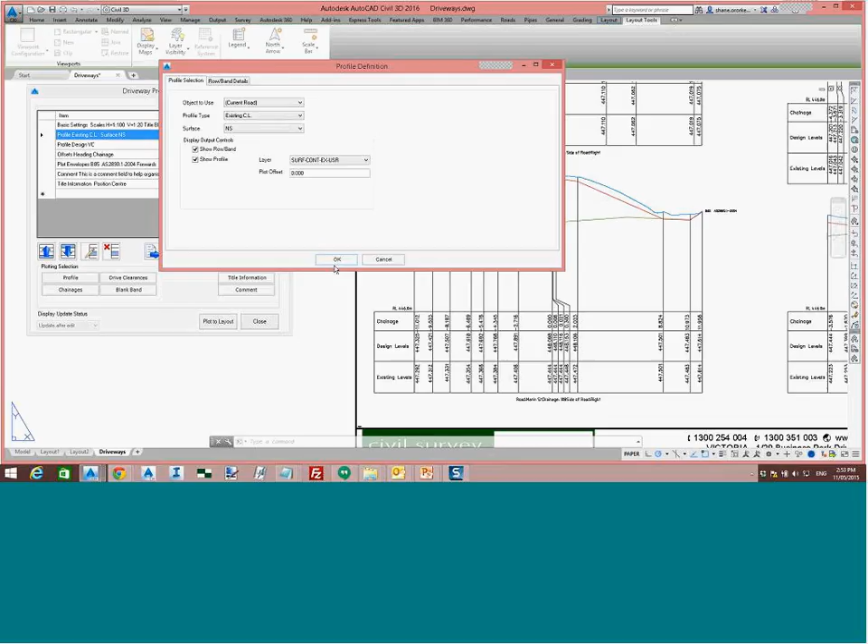Okay, so you've now got a lot more control about what layers you want things to be on, how you want them to do. I think it's a lot easier that you tick what you want and then you get the detail at that point. I'll go back to existing centerline for this. I want to show NS, that's fine, click OK. You can see I just changed the layer of that. The design VC is important because that's controlling the presentation of your driveway design.

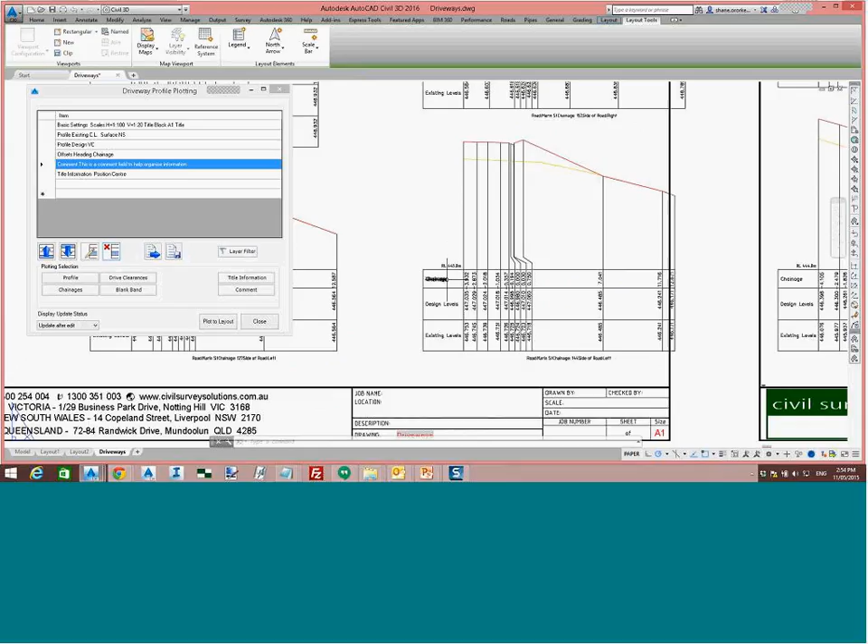What's a little bit different in here, if you have a look at the plot envelopes entry, if I just delete that, they're the driveway designs, and there's the existing surface. One thing I do want to say about the driveways, at the moment, we're not filtering the sampling, so the sampling is coming off the grade breaks of the design. That's something we need to work on, but at this stage we don't filter that.

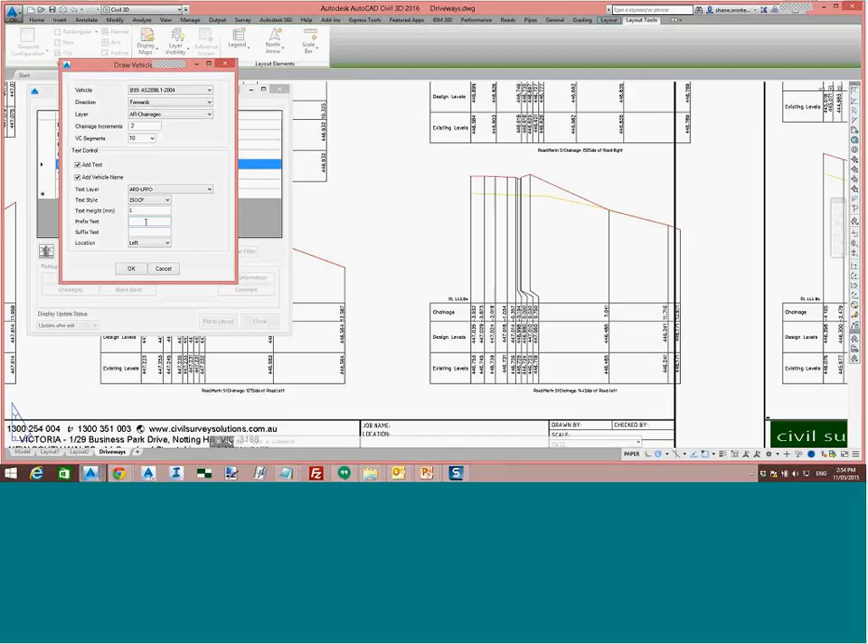If we click on drive clearances, I might want to show the B99 vehicle. I want to show the forward direction. I want to put it on a certain layer. I've got an increment to check. And I want to add some text with the vehicle name. I want that to go on a certain layer with a certain height and a certain text style. And I want to have that on the left.

Once I click OK, I'll see that update immediately with the layer control, with the line work based on that sampling regime. When you want to plot, pretty much you go plot to layout and it creates that layout as we go. So as a quick show on the long section plotting, there's certainly improvements still to make, particularly on the filtering and some of the arrangements here.

I think once we get our formal long section plotting sorted out, we'll take that learning and those improvements and we'll roll them back into the software proper here. Title information I won't go into, but that just adds title down the bottom here. Actually, maybe I should go into it. A couple of cool things you can do.

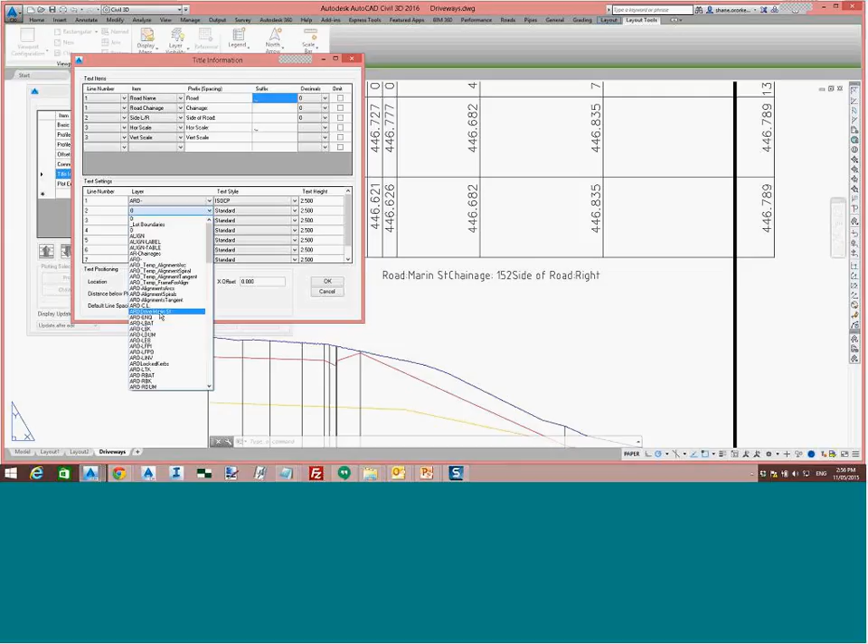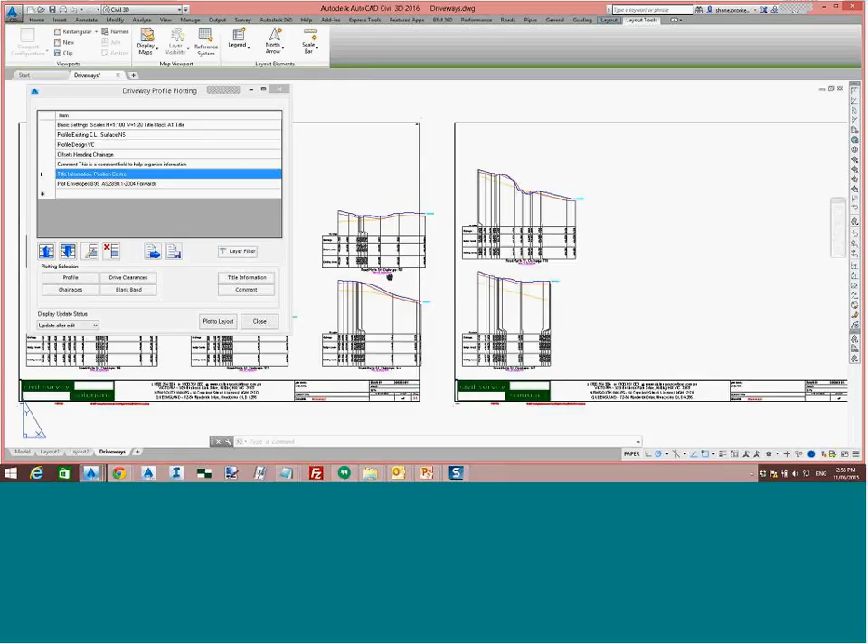So you can specify what layer each of the lines should go on. You can also specify what text style and what size the text should be. So I'll just do a little bit of a cascading size so you can see the impact of that. I'm going to set the space between each line to be 0.5 units. Once I click OK, you can now see, you get that cascading text. So there's a little bit more control on the title than there used to be.

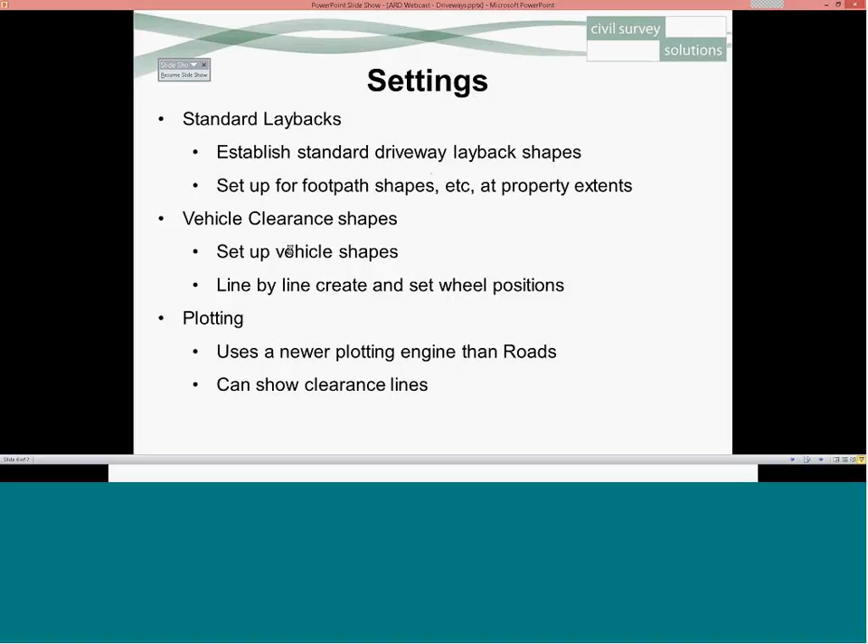Okay, so just go back to my PowerPoint. We've just gone through the settings. We had a look at the laybacks. We had a look at the vehicle clearance shapes. We had a look at plotting. Just looking a little bit further forward, picking up some customer input to date. Certainly, the way we look at the driveway clearances is to use a pin approach for the wheels. There's been some customer requests to somehow more accurately represent the fact the wheels have a radius. So we are looking at options for how to deal with that.

One approach is to have dual laybacks that get applied. One detailed layback is what we draw, and then a simplified one that the user can edit to simulate how the wheel's going to roll, because it won't roll into that bull nose, it will roll over the top of it. So that's one approach to dealing with the fact we're doing a pinprick approach instead of a wheel approach.

There's certainly been some requests to do driveway modelling, so incorporate the driveway into the full surface model. So that's something that we've got on the books for a future improvement. At this stage, if you do want to do driveway modelling, you really need to create a string or a road and put it into the system that way. Certainly people have asked for some more plotting control, which, as I said, I think will be aligned with improvements we're making to the road long section plotting.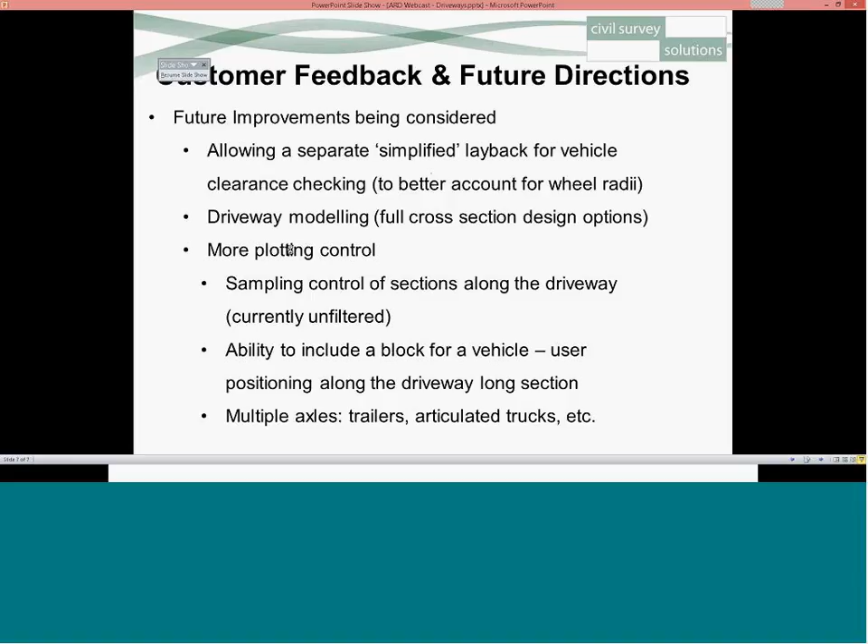We certainly welcome your input into the driveway tool, whether you use it, whether you don't use it, whether you will after this webcast or whether you won't, what you like about it, what you don't. But look, that sort of rounds out what I wanted to cover. Hopefully you've seen enough detail in the driveway tools to get sort of an idea about how it works.